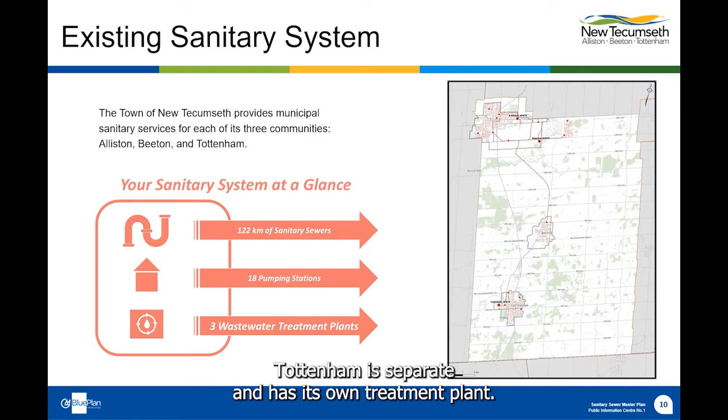Within Alliston, there are over 74 kilometres of sanitary sewer. There are 11 wastewater pumping stations and 2 wastewater treatment plants, the regional treatment plant and the Alliston treatment plant. The Alliston treatment plant is reaching its capacity and currently operates at around 80%. However, the regional treatment plant has much more capacity, and understanding the balance of flows between these 2 facilities will be a key consideration for the servicing solution for Alliston.

In the downtown area, there is a lot of aging infrastructure, old sewers that require attention. Being able to identify the needs of growth together with the needs of renewal will provide efficiencies for servicing. There are some environmental considerations in Alliston. The rivers and creeks, whilst they may present some servicing difficulties, are also important features that need to be respected and understood in terms of preserving the environment of the area.

There is a significant growth plan for Alliston, and as I mentioned, around the downtown infrastructure, it's not just greenfield growth, but it's also intensification growth, which is about higher density growth within the already built urban areas. There may be some developable land that is going to require a new pumping station in order to be serviced, and this will be a key aspect of the servicing strategy that is ultimately going to be defined for Alliston through this master plan study.

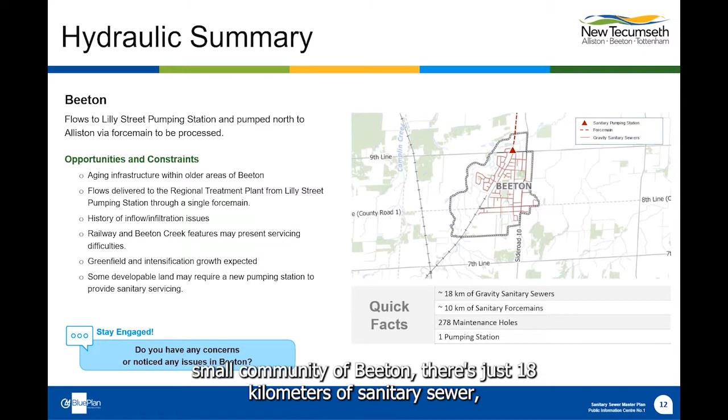Within the smaller community of Beeton, there is just 18 kilometres of sanitary sewer, and there's only one pumping station, Lilly Street Pumping Station. However, all of the flow within the community collects at Lilly Street Pumping Station and is pumped north to Alliston for treatment at the regional treatment plant. Because all of this flow is transferred via this one pumping station and a single force main, it's a potential point of vulnerability for the Beeton system and acts as the limiting factor in terms of capacities.

Within the area, there's been a history of inflow and infiltration issues, and the town in the past has invested in studies and remediation efforts to improve the situation. Inflow and infiltration is the ingress of water into the sewer system from external sources, perhaps through downspouts or something similar.

Again, we're expecting to see greenfield and intensification growth within Beeton, so maybe some higher densities in the already developed area, as well as new development on the extremities of the current urban area. It's likely that some of the developable land may need a new pumping station in order to service it, and that will be an important consideration for where the growth goes and how it's going to be serviced going forward. We want to hear from you about your experience of the drainage in Beeton. Please contact us and let us know.

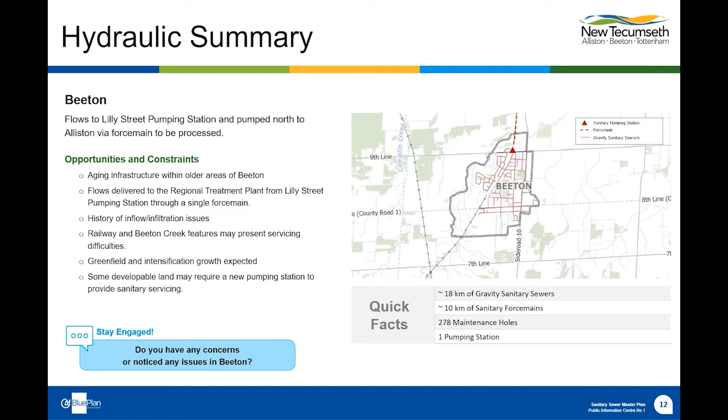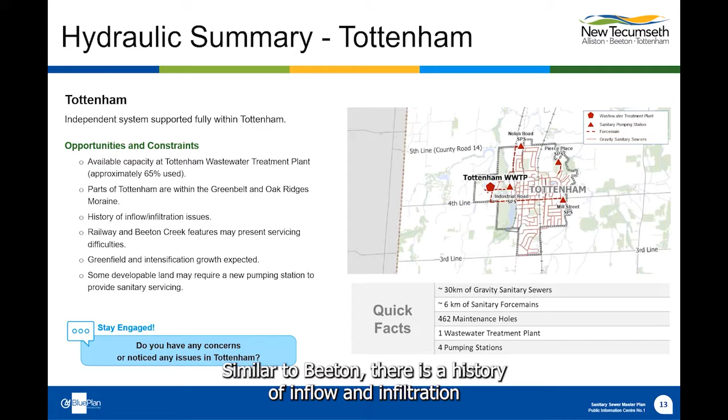Within the community of Tottenham, there's around 30 kilometres of sanitary sewer. There's 4 wastewater pumping stations and 1 wastewater treatment plant, which takes and processes all of the flow from the community. The treatment plant does have capacity and currently operates at around 65%. Similar to Beeton, there is a history of inflow and infiltration issues in the area, and again, the town has invested in studies and remediation efforts to improve this situation.

There are some servicing obstacles in Tottenham that are specific to the area. Parts of the area are within the Greenbelt and the Oak Ridges Moraine, which are environmentally sensitive areas that will require special consideration for servicing. There's also the railway and the Beeton Creek, which may present servicing difficulties in terms of crossings and being able to change the configuration of the system.

We want to hear from you. What's your experience of the sewer and the drainage system in Tottenham? Please let us know.

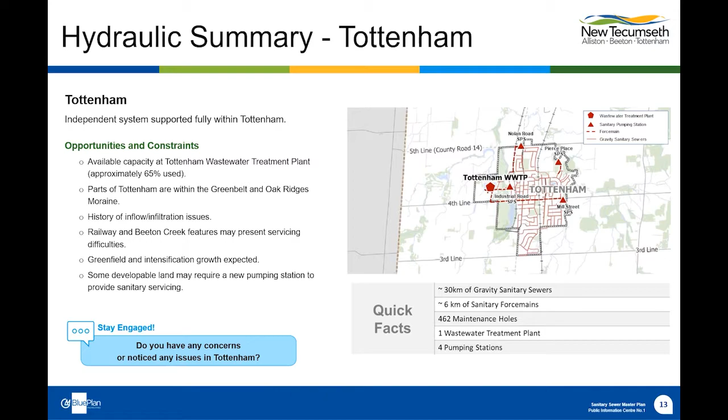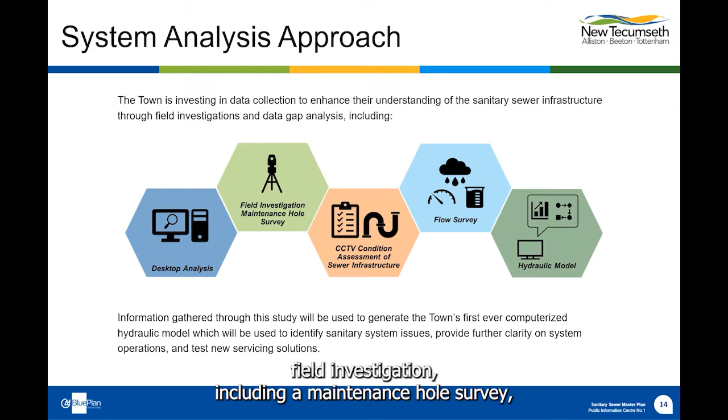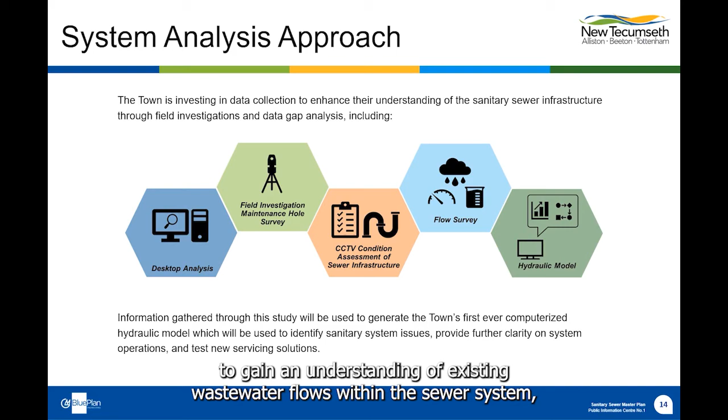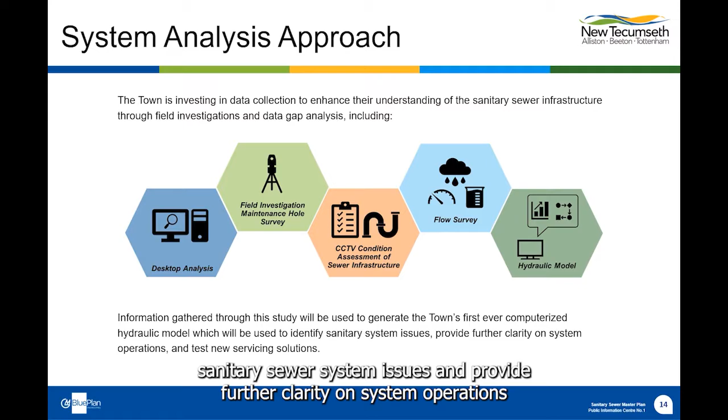The town is investing considerable time and resources in data collection to enhance their understanding of the sanitary sewer infrastructure through field investigations and data gap analysis, including the following: desktop analysis of known information and previous work completed, field investigation, including a maintenance hole survey, CCTV or closed circuit television condition assessment of sewer infrastructure, a town-wide flow survey to gain an understanding of existing wastewater flows within the sewer system, and information gathered through the study will be used to generate the town's first ever computerized hydraulic model, which will be used to identify sanitary sewer system issues and provide further clarity on system operations and allow for the testing of new servicing solutions.

One of our most commonly asked questions is, what is a hydraulic model? A hydraulic model is a computerized version of an existing sanitary sewer system, and it's a representation of infrastructure operations calibrated using existing asset information that we gather from surveys. So what can we do with it? The model can be used to address all kinds of different scenarios, including future population growth, resiliency to climate change, emergency servicing plans, and system sensitivities. Results from the hydraulic modeling analysis will feed into the development of a sanitary sewer capital plan to ensure timely implementation of infrastructure upgrades.

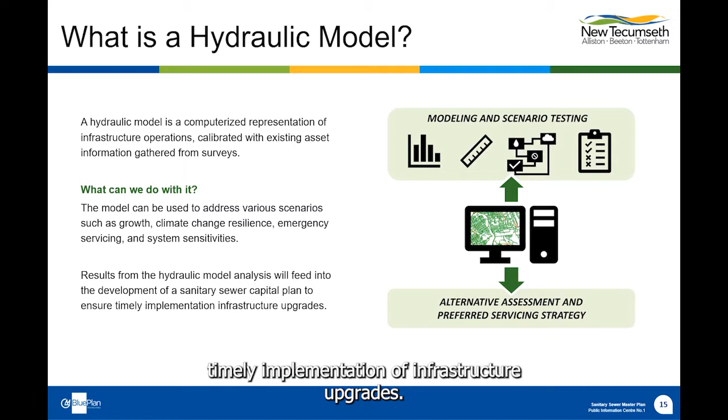So what's next? We will review and consider any input received through the project survey, the website, or any emails received. We'll make sure that we respond to anyone that provides input. We'll be using our newly developed hydraulic model and the survey information collected to help identify and then evaluate the servicing strategy alternatives. Ultimately, we'll be selecting the preferred servicing strategy, which we will present at Public Information Centre number 2. And at that time, we will again be seeking input from public and stakeholders for their opinions on the plan. The final project report will be prepared and submitted to the town council, as well as the Ministry of Environment, Conservation and Parks. It will then go through a mandatory 30-day public review period before being adopted by the town.